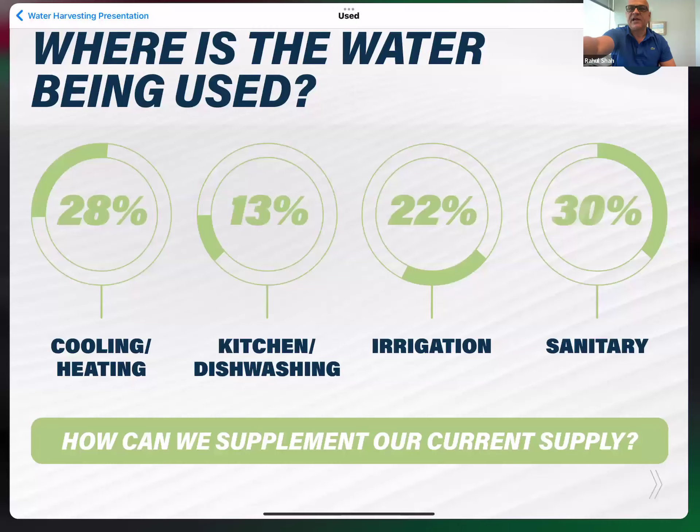Yeah. So to begin with, you're right. What we've done is we've been able to make sure that anything that we do, we're going to do our best to make sure that we have the ability to... Oops, I think I did something wrong here. Forgive me. That we have the ability to provide a financial ROI. Most of our systems which are out there have an ROI of less than 4 years. So 25% ROI is our target on any reclaimed water system that we sell.

I thought I'd start off by just showing people where in a large commercial or institutional building the water is used. This is EPA data, from their WaterSense website. And you'll notice that in a large commercial building, 28% of the water is used towards heating or cooling. Water is the safest, cheapest media to either reject heat or cold from a building.

13% of the water is used for kitchen dishwashing, which is potable. Another 22% average across the country is used for irrigation. And then 37% is just sanitary waste, which is human consumption. So in this matrix, you can see 50% of the water is used for non-potable applications. And that's where we've decided to focus.

Because if we can make an impact on the non-potable applications, it's a lower risk profile, not just from our perspective, but also from the building owner's perspective, to not mess with human drinking water or any water that comes into contact with human beings. So that's where we've decided to focus.

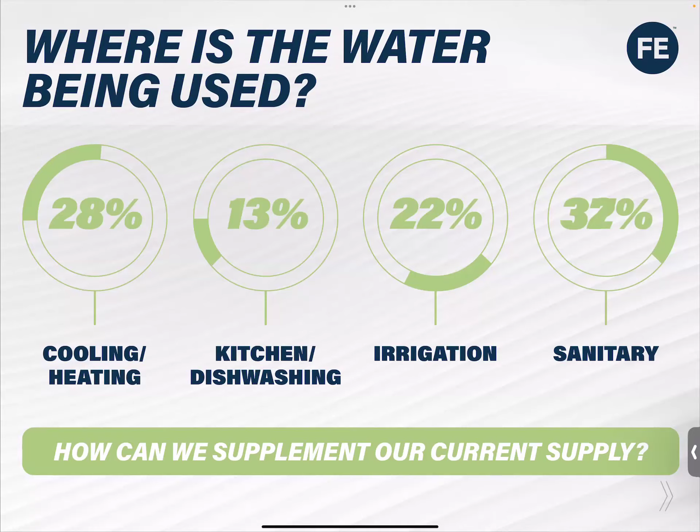And it's also interesting, our focus currently has been on existing buildings. On new buildings, there are several technologies available. Gray water, for example, is the prevalent technology to capture lightly used water, like laundry, sinks, showers. Anything that's not black water can be reclaimed and reused for non-potable applications like toilet flushing, cooling tower makeup, irrigation, or utility washes in a new building. But what I want to focus on today is existing buildings.

And it all started off with rainwater harvesting. So let's just be honest, okay? In the areas where there is a paucity of water, particularly in the United States, the further out west you go, the rainfall index just isn't there. And even in areas where there is good rainfall, like Florida or other parts of the country, the city infrastructure is aging, and they don't have the catchment systems that can capture that water, store it, clean it up, and then meet the continuously growing demand for water, right? So rainwater is really hard to do.

If you have an existing building, even with a large flat roof, that water exits the building in multiple different places. So how do you bring it together to a central place? That's hard to do. You have to rip the building apart. And then you have to catch the water when it rains. It doesn't rain 24/7, 365. So you need a 500,000 gallon cistern. That's hard to do, to find the mechanical space to store those systems. So rainwater just doesn't have really any good ROI, in our opinion.

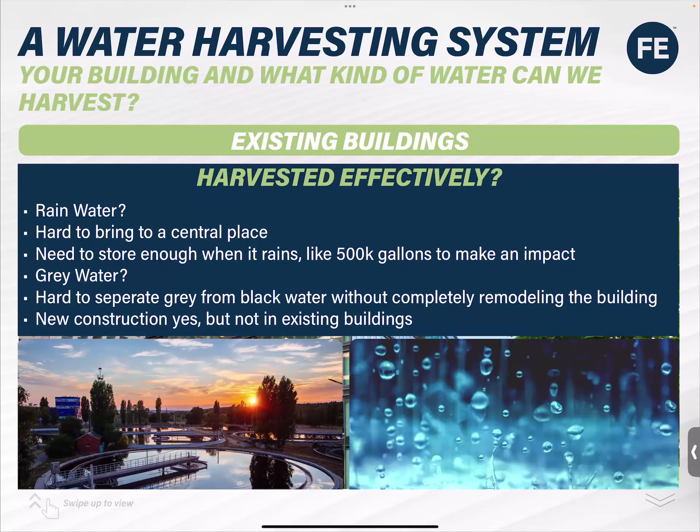So we found two sources of water in a building where we don't have to do that. And yes, we have the use cases available. What we've discovered is that there is a vast amount of shallow groundwater in the United States. If you go to the Midwest, Los Angeles, Las Vegas, Dallas, Florida, Atlanta, a lot of major metropolitan areas that have these high-rise buildings that use huge amounts of water.

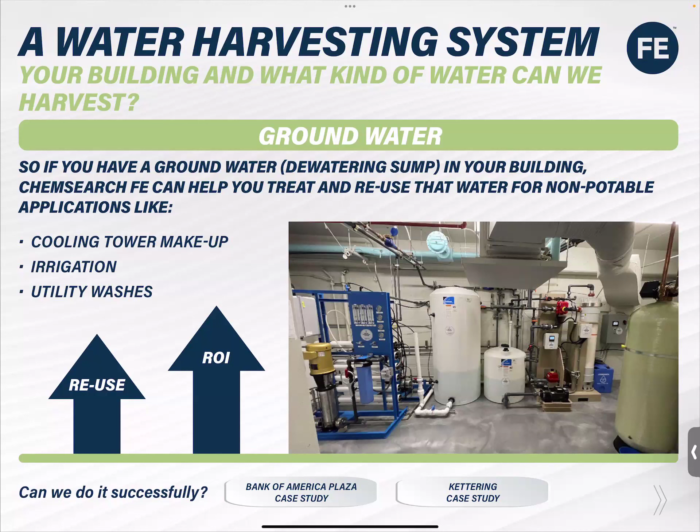And let me put the use to you in perspective. So at your home, you would have a 1-ton, 2-ton, 5-ton system that would cool your home. A commercial or institutional building has a 1,000-ton, 2,000-ton, 5,000-ton cooling system to meet the demands of cooling that particular building of that size.

That is especially one that's occupied, because human beings are just 98-degree heat pumps, essentially generating heat. And the more humans you have in a building, the harder it becomes to cool the building. So if you have a 1,000-ton cooling tower that operates at 100% load, 365 days a year, which in many parts of the country it does, you would use 8 million gallons of fresh potable water to cool that building. That's a lot of water.

So what we found is there's an opportunity with the shallow groundwater. If you have a 60-story building, 40-story building, 20-story building, generally speaking, in order for that building to stand upright, you have to go into the bedrock to set the foundation. And when you go into the bedrock, you often run into a water table, and you engage in a process called dewatering, which is essentially they eject the water from the construction site. So it prevents something called sloughing that makes the soil stable during the construction process.

And then that dewatering well, which is just a well with a pump in it, becomes part of the infrastructure. And then through the course of the life cycle of that building, that water is just ejected, and it's in shocking numbers, right? So it's fresh groundwater. It's not reclaimed. It's just shallow groundwater that is being ejected and lost. So we found an opportunity in that. We have 3 use cases that are available, and we use the water primarily for cooling tower makeup.

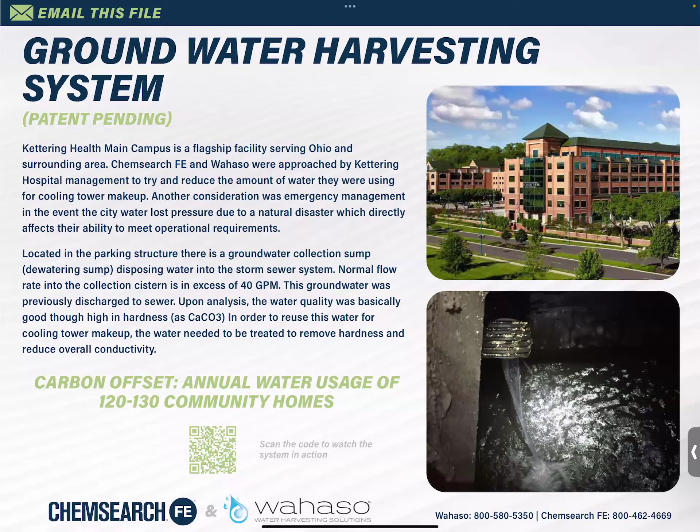So this is a picture of the dewatering sump, and we put in our groundwater harvesting system in there. This system is designed to operate at 43,000 GPD. It's a mixture of low pressure RO, pre-filtration, and then some custom blending to make sure that the water quality we deliver to the cooling tower is the same, if not better, than what the city sends them.

And in the last year, we saved this building 7 million gallons of water. And even though this particular slide says that we had projected a $90,000 cost savings, in the first year we saved them over $141,000. Wow. If you look at the ROI, the total burn on the system, including the installation, was about $400,000. That's under 4 years. So really good ROI, and no detrimental impact on the cooling tower because of the quality of the water that we're sending.

And then the pressure that the hospital was putting on the city to be able to give them this much water is released. So the city can take their water and meet more demands that the public has, because this particular facility had the foresight to do something innovative. And this system's now been in operation for 2 years, so it's fully operational.

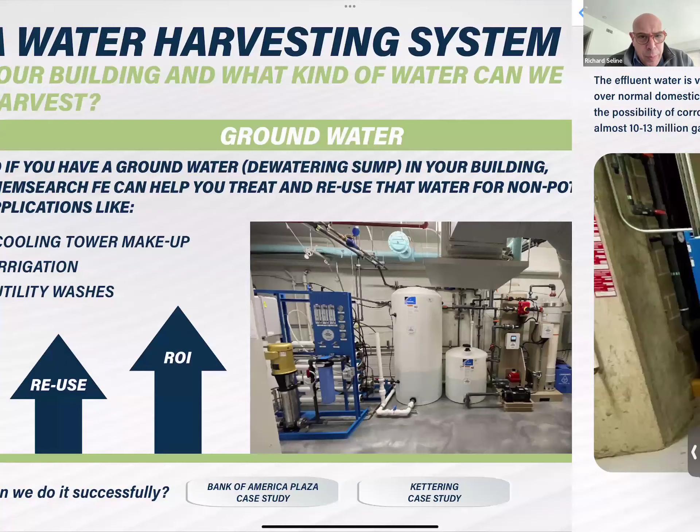Rahul, let me make a quick observation. First off, a hospital system is considered critical infrastructure. Yeah, that's the other part. Right. This hospital had come close to experiencing a force majeure event where they had a storm, and the main city makeup line runs under a creek, and they almost lost pressure. So if they had lost pressure, there go the ORs, the ERs, the data centers, everything that requires critical conditioning, because the air handling system would have gone down.

So now, in the event that, God forbid, that happens again, at least the building has the capability of making sure that those critical areas that require critical patient care, data management, which deals a lot with data security as well, are conditioned and continue to remain operational until the city is able to restore the power.

Does that answer your question, Richard? And that's spot on, because one, because of its critical infrastructure nature. Two, because of its business continuity, like any institution or building must maintain. But the third part is, like you raised, that the hospital system, through y'all's application here, is actually providing a reserve amount of water back to the citizens, which becomes a shared benefit of everybody.

Yeah, keep on going. I mean, what occurs is that the city doesn't have to give the 17 million gallons that Kettering, or this hospital in Ohio, needed to run the evaporative cooling system. The city now only had to provide them with 10 million, because we were able to manufacture or give them 7 million gallons of in-building water, right?

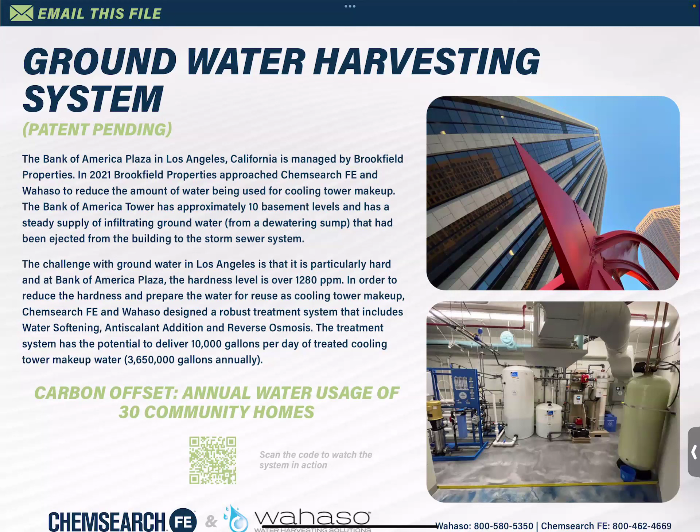This is another use case. This was the first one that we put out there. This is at the Bank of America Plaza in downtown LA. This one's 55 stories, 5,000 tons worth of cooling. This was the first system. They have a dewatering sump in there, a big 60-foot sump, and this system is designed to operate at 10,000 GPD, and saves 3.65 million gallons of water a year for cooling tower makeup.

And then our most recent system is in Schaumburg, Illinois. This is for Zurich American Insurance, their world headquarters. This system is designed to operate at 25,000 gallons per day for cooling tower makeup. They have a dewatering sump as well. So we're going to save them 5 million gallons of water.

That system is now fully operational and, because it's still not peak cooling season in Chicagoland, is saving about 10,000 GPD right now. But as the temperature ramps up, that water demand is going to go up, and the system is rated to meet those requirements.

So this is two-stage filtration. We do an ion exchange because the water was really mineral dense. So we apply a resin bed to get rid of the calcium and the magnesium, and then we further purify the water using an 8-membrane RO system, and then it goes into a holding tank.

And it's a fully automated system tied into the building automation. So when the cooling tower says, hey, I need water, if the system is making water, it will first take water from the system. And then if the system is not able to meet the demand, it will switch the valve over and start pulling from city.

So we've got 2 other projects in the works. There's a system that's about to go into a pretty prominent building in downtown Houston, and also at a very large university in Ohio, which has a shocking amount of groundwater. And we're also working with a couple of really large casinos in Las Vegas, where these buildings have 50 million gallons of shallow groundwater that's basically just being lost to the storm sewer system.

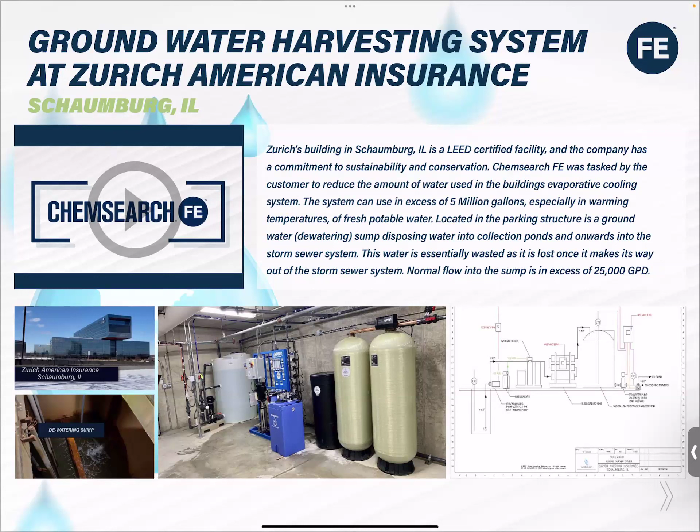And once the water goes into the storm sewer system, it doesn't go to the city anymore. It just gets lost into whatever area that storm sewer system enters, into the ocean if you're close to the shore, or into the desert, or back into an aquifer, but it's really hard to see where that water goes. So that's our current use cases.

The other use case for existing buildings is a source called cooling coil condensate recovery. If you have a building with a 500-ton cooling load, you can generate 1.2 million gallons of water per year. This is pretty simple. The way you get rain is you have heat, water evaporates, starts to rise, comes into contact with cooler temperatures as it rises, then turns into water vapor, condenses, and you get rain.

Same thing goes on in a building's air handling system, where you have really hot air blown over a really cold coil to reject the heat and send cold air back into the building, but that creates condensation. And this is a really pure form of water. It is free of ions, so it's almost better than DI quality water. So when that water is sent to a cooling tower, you generally get a much better cycle experience, and that water goes even further.

Rice University in Houston, for example, captures 15 gallons per minute out of their air handling units, between 12 to 14 million gallons of water saved per year out of a variety of different air handlers.

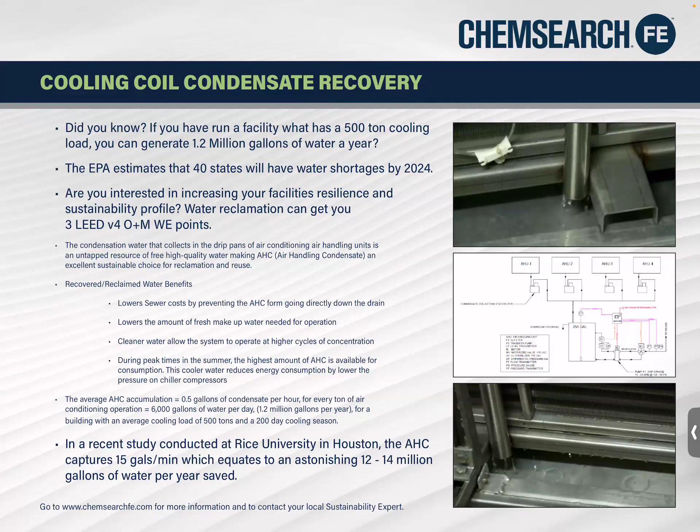We're working with the Crypto.com Center in downtown LA, and this is a shocking number. They've got a 4,000-ton cooling system. Out of their 5 or 6 main air handling units, they get 5 million gallons of water a year that currently is going down the drain, and it's pure water. So these are the two primary sources of water that can be used in an existing building to capture and reclaim some water without having to rip the building apart.

Wow. And I mean that seriously, because what you just walked through is 3 different types of buildings, 3 different types of geographies, 3 different types of demands. So what I keep on coming back to is this idea of resilience. How do you help a building, a campus, a community to remain resilient against any number of types of threats and disasters, but also how do you create an uninterruptible supply of water?

I think you just said that, and you and I talked about this early on, that Ed Archuleta, the former CEO of the El Paso water system, became known across the country by saying that the best water you got is the water you got. Yeah, and there's a dual impact here, Richard. Currently the way it works is most city water utilities have what's called a closed circuit system, right? So every drop of water that hits a drain in a building eventually makes its way back to the treatment plant and then is cleaned up and reintroduced into the water supply.